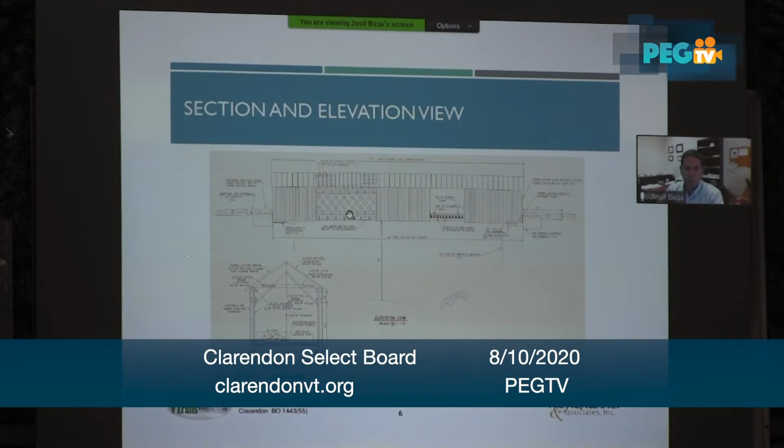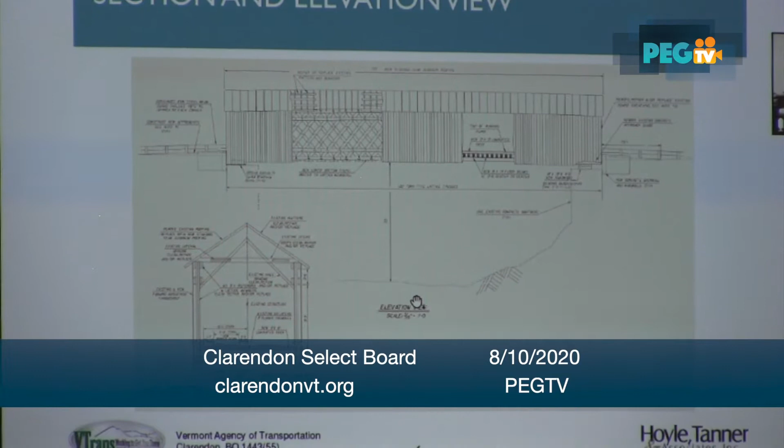This sketch I took from the 1987 plans, and you can see the elevation of the bridge. It's partially showing the truss, partially showing the floor system and the siding, just to show you the different structural components. And then the bottom of the channel to the bottom of the bridge, as I mentioned, is over 30 feet, so it's quite an entrenched channel where the bridge crosses the Mill River.

And then we have the cross section. We have the two trusses, the two town lattice trusses. We have the bracing between the trusses, the floor system, and then the trusses are spaced at 15 foot 7 inches.

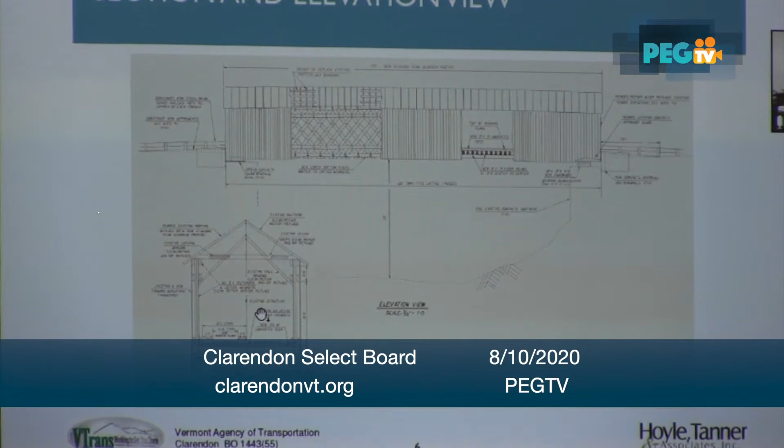As I mentioned earlier, we did the inspection back in June, and we used the National Bridge Inspection Standards. That way we're all communicating with the same verbiage, the same terminology. So we use a scale from 0 to 9, with 0 being failed or closed condition, and 9 being excellent condition. So for each component of the bridge, we assign a rating anywhere from 0 to 9.

So for the deck, we provided a condition rating of 7, or in other words, it's in good condition on the scale of 0 to 9. So you're pretty close to 9 on the deck condition. Superstructure, not so much. It's halfway between failed and excellent. So on the scale of 0 to 9, it's a 5, or fair. So the superstructure definitely needs some work.

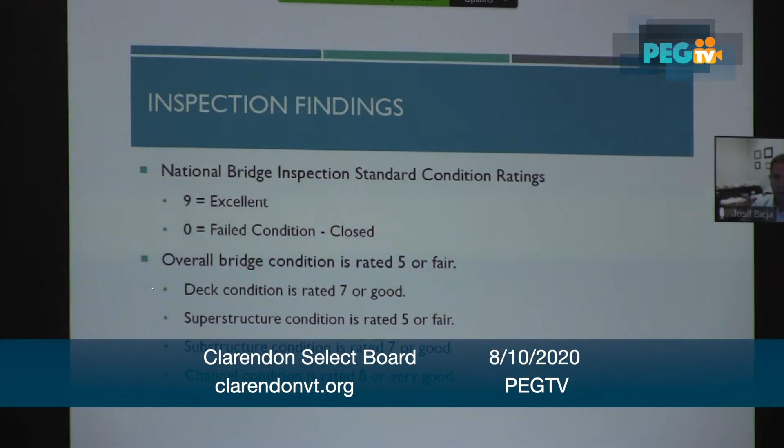Substructure, it's a 7. So similar to the deck, you have it in good condition. And then the actual condition of the channel where the water passes, it's a rating that's 8 because it's a fairly entrenched channel. We have bedrock on the bottom, and there's no concern for scouring of the existing substructure units.

So for the next few slides, I'm going to show you a lot of photos. I'm going to show you some of the deficiencies that we found. And then we're going to continue with the process as to what process we have to follow for the project.

And in some other cases they had nails, a series of nails on the ridge cap. So that's a place where rainwater, storm water is going to get into that connection between the nail and the screw and the ridge cap, and then it's going to make its way into the members down below the roof. So there's definitely some issues with the ridge cap that need to get addressed.

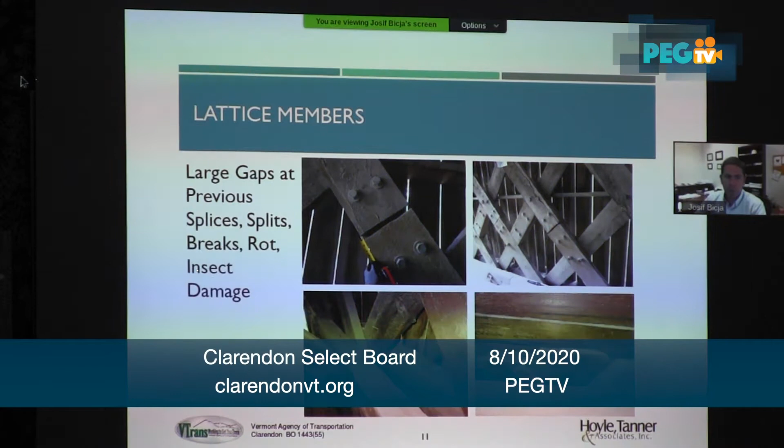Some other deficiencies, we found some splits on the lattice. On the photo on the lower left-hand corner, you can see a split right down the lattice. The adjacent photo right next to it, this is the top of the lattice on the top chord near the roof. You can see that smaller portion of the lattice here that I'm pointing to used to be connected to the other portion, and you can see it's quite a gap. It's almost 4 or 5 inches gap where the lattice split. So there's definitely some issues with the lattice members.

This didn't happen overnight. This has happened for quite some time. And the bridge is slowly trying to get out of shape and warped. So there's definitely something that we need to address as part of the rehabilitation.

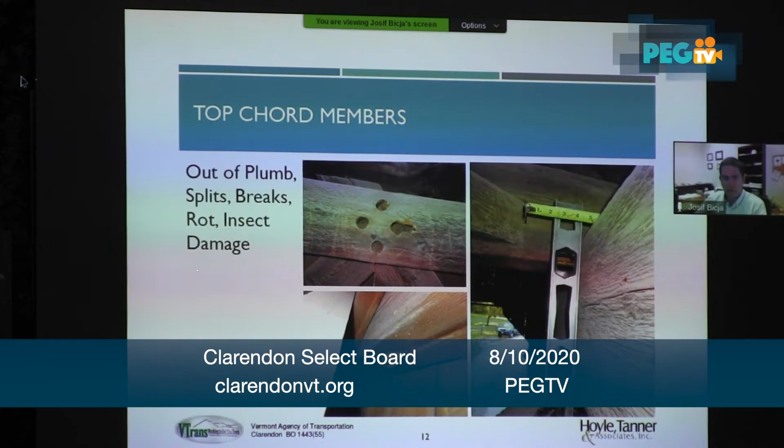And as we look in between the two plies of the chord, that ice pick went right in, at least 6 inches in, and that was not visible to any of us, but by looking into those joints, we were able to find a lot of locations where you have that condition, where you have the dry rot between the two members. The bottom chord is in really good condition. It was replaced in 1987.

The one thing that was done out of the norm was the bolted connection. Everywhere else on the bridge we have the trunnel connections, or the tree nails, another way to say it. But on the bottom chord, the members were fastened with four 2-inch bolts. When the bolts were replaced back in '87, they were galvanized bolts, but you can see on some of the photos that I'm showing here that there's a lot of rusting going on.

So the reason for that is not that the galvanizing failed prematurely. It's actually the treatment that was used in the timber. We suspect that the treatment used on the bottom chord was the chromated copper arsenate, CCA, the copper chromium preservative, and that preservative is really corrosive to the steel. Even if it's galvanized, it creates a lot of corrosion, and that's what we see here.

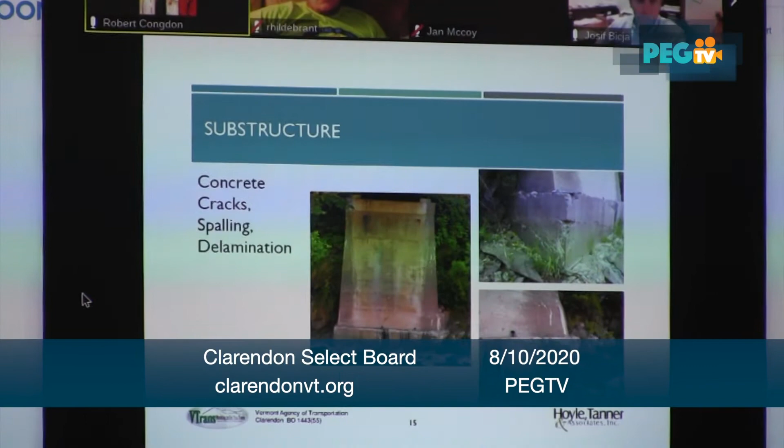Joseph? Yes. Josif, if I can interrupt you for a minute, we lost you about 5 minutes ago here at the main meeting. The slide you were on was the picture of the major support member underneath that was rotting away, sideways. Yep, that's where we lost you. This one. Yep, that's where we lost you.

So what I was explaining was the rot that we had on the bedding timbers, which is creating an uneven support surface for the bottom chord of the southwestern quadrant of the bridge, which is causing some of the racking on the picture that I showed you earlier with the level, where we had it out of plumb by 3/4 of an inch. That's what's causing that racking in the bridge.

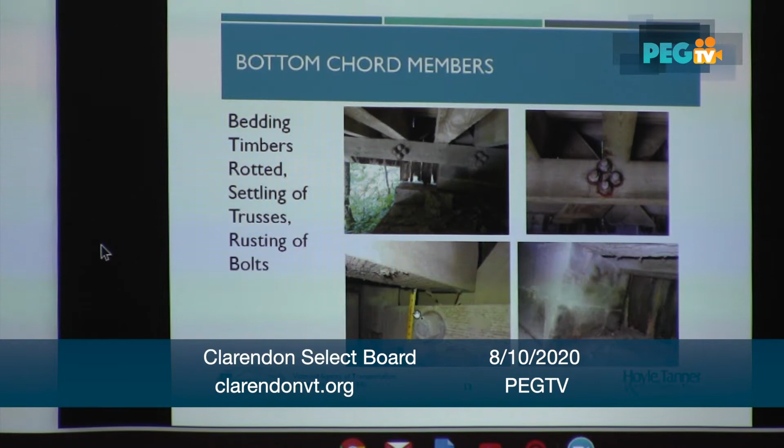And then the photo on the left, you can see the gap that's created from the bottom chord to the floor beam by as much as 3 inches. And that floor beam is essentially supported by the deck now, by the nails penetrating the deck.

I was talking about the runners. They trap debris. They also are a safety hazard. If you're traveling over the runners, you're doing great, but if you get off the runners, it's very hard to get back on them. So if there's a vehicle that does that, you could potentially impact some of the structural members, and there's no curbing to prevent the vehicle from hitting the truss.

So we're definitely gonna look into the runners and make the recommendation to do them full width and not have two lines of runners. And then we're also gonna look at potentially adding some kind of curbing to prevent any vehicles from hitting the structural members of the truss, because we saw a lot of evidence down below in the bottom chord where the trunnels were hit by, I don't know, maybe certain vehicles; the trunnel head was broken in many locations.

So again, the only real deficiency on the floor system is the runners. The floor beams are in really good condition. The deck is in really good condition. They've been in service for 33 years, but they're definitely working really well for the town, for the capacity that they have the bridge posted for.

The abutments are in pretty good condition. There are some deficiencies. We have some concrete spalling, some cracking. We have some exposed rebar. That all can be fixed.

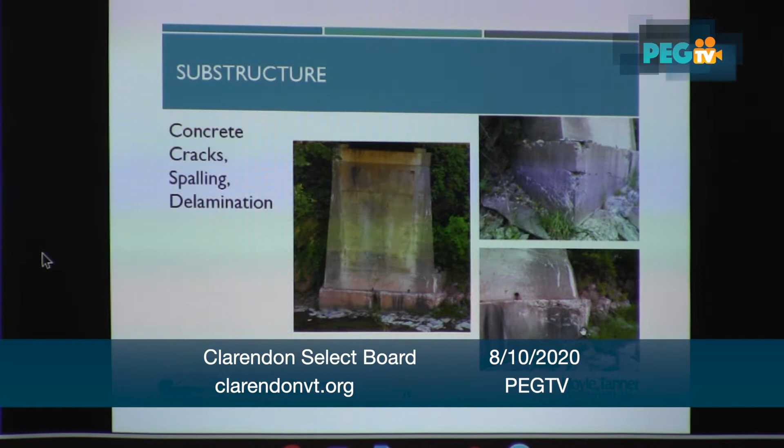The only challenge is the access, trying to get the equipment and personnel from the contractor down below into the chasm of 35 feet. You've got no really easy access to get anyone there, so that's a challenge, and that's what's going to drive the cost up for the substructure repairs, because the repairs are not that terrible, it's just access to get to it.

And then I mentioned the rehabilitation options that we're going to look at. We've seen the bridge, we have a pretty good idea of the condition of the bridge right now and how much service life we have; we're going to estimate it. But we definitely want to extend the service life, because if the bridge is left as is, you're going to see an exponential loss in the strength of some members if you do not do anything to it in the near future. So some of the rehabilitation options are definitely going to look into extending the service life and also increasing the capacity anywhere between 3 tons to 20 tons.

And I had a brief discussion with one of the selectmen. I think when we were doing the inspection, he came over and I explained to him all those different options that we're looking at. And I will explain it again, that the 20 ton could be alarming to the town. You could say that there's no possible way that you're going to be able to fit a 20 ton vehicle onto the bridge. But just because we designed a bridge for 20 tons doesn't mean that you need to post it for 20 tons; you're going to have some reserve capacity.

So say we design it for 20 tons, you could post it down to 3 tons, and then you know you have the reserve capacity should you ever have a need to use it, if you have an emergency response vehicle that needs to cross the bridge at that time.

So we're not sure where we're going to be in here. My guess is that we're going to be on the lower end of the scale, between 3 and 12. In order to bring the capacity all the way up to 20 tons, it's going to be substantial cost, and it's going to be substantial rehabilitation and replacement of the truss members in order to get it up to 20 tons. So those are the options that we're looking at, because at this point we don't know how much more money it's going to take to rehab it from 3 to 12 or from 3 to 20. If it's a small differential, then it may make sense to bring it all the way up to 20 tons. But that's what we're going to look into.